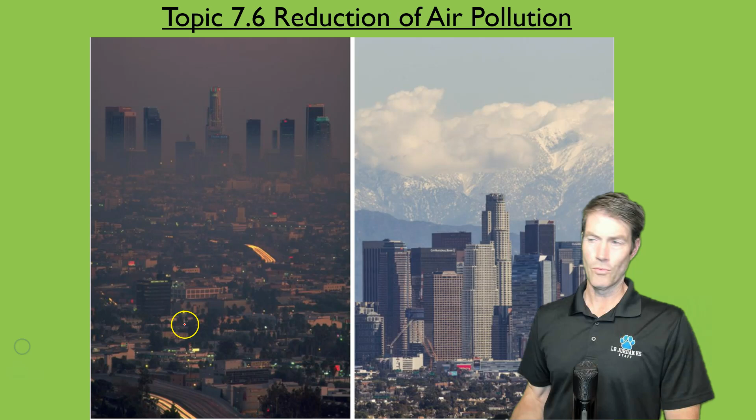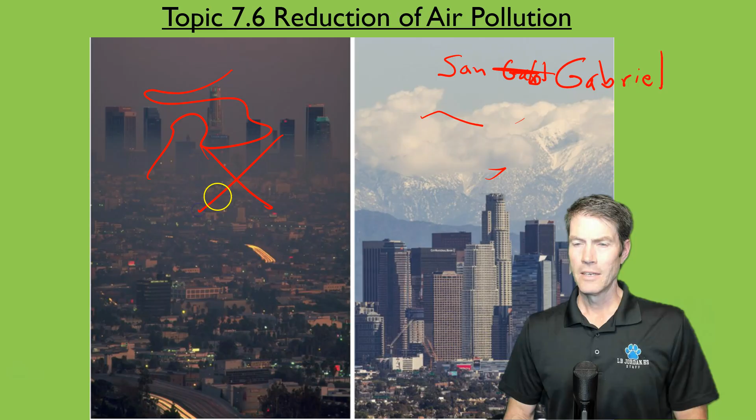So I'm just really happy when I can look out there and see the beautiful San Gabriel Mountains, see Mount Baldy instead of seeing all this haze. So this we don't want. So we're gonna get into how that happened. So lots of different methods that we have used here in California. One of the most effective is through regulations.

Companies complain about regulations all the time. People complain, in general, about regulations, but regulations help us live a more successful, happy life. Think about what daily life would be like with no rules at all. We know we need rules to live by in school, just going by our normal family life. We know we're happier when we follow rules, and when we follow rules for clean air, it definitely works out better for everybody. So regulation, different practices, conservation, so using less energy.

And using alternative fuels. So instead of the regular gasoline, trying to use biofuels or hydrogen. Biofuels don't really tend to work too well. About 15 years ago it was popular, people running their cars on fry grease or oil from fryers from fast food restaurants and restaurants in general. But even though there's a lot of that waste oil, there's not enough to really power our society.

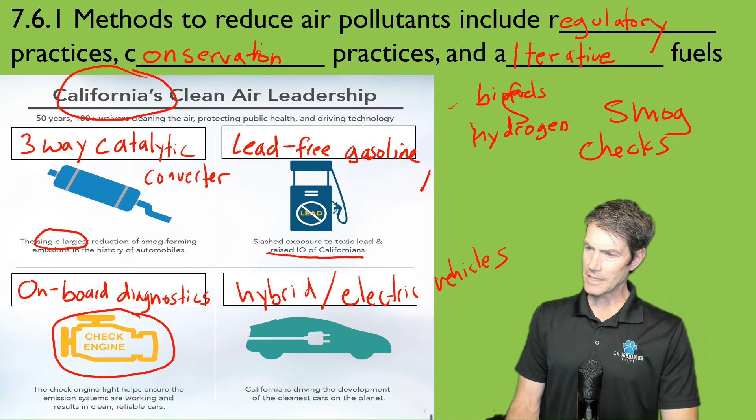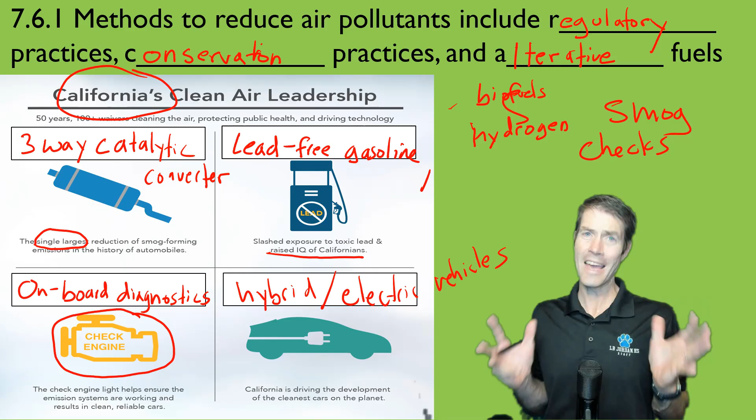And then down here we have hybrid electric vehicles. And I know you have seen, they're becoming more popular. Every time there's a gas crisis, a crunch, an increase in gas, they tend to get more interest in cars like this. I have yet to get one of these cars, but I'll tell you what, I will not ever miss going to a gas station again. So that's one thing that I could definitely do with that.

I love cars. I love a gas engine, the way they sound, vroom, when they turn on. Oh, I love that. I love it. I know it's killing us slowly, but I love it. But I could get used to an electric car and not going to a gas station.

Something that really kind of tripped me up when I first came to California, when I went to get gas the first time: all the gas pumps have these funny plastic shrouds over them. And those are vapor recovery nozzles.

So, I don't know why that happened. Nozzle.

You know what? It's just where it's going on the screen. So I'm going to write nozzle below it. Hopefully it won't keep popping.

There we go. So air pollution control, there's vapor that comes off. There's fumes when you're gassing your car. If you've ever been near it, you've smelled these. Some people think they smell good. They might smell good, but you shouldn't be smelling them. So try to stop, force yourself not to smell those.

So it's brilliant. So instead of all these tens of thousands of gas stations, when people are gassing up, releasing all these fumes and vapors into the air, instead of going into the atmosphere, they go back down the hose and back down where they belong, in the underground gas tank. So it prevents them from going into the atmosphere, which is a great thing.

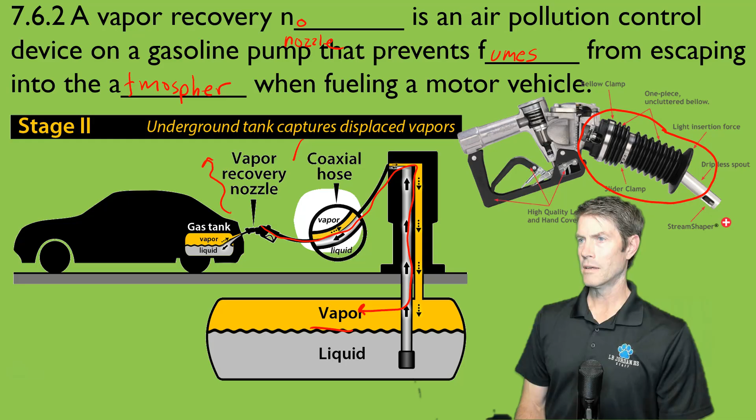Still kind of trips me up. When I go back to Washington State, we still don't have these. So I still am not quite used to not having that big vapor recovery nozzle on there. But yeah, check this out. I think that's awesome. It's totally cool.

Another thing we talked about, the catalytic converters, air pollution control device. See, I'll learn my lesson someday. I'm going to write that here. Air pollution control device for internal combustion, meaning regular gas or diesel engines, that converts different pollutants. Carbon monoxide, remember that's an asphyxiant. Nitrogen oxides, represented usually NOx, and hydrocarbons.

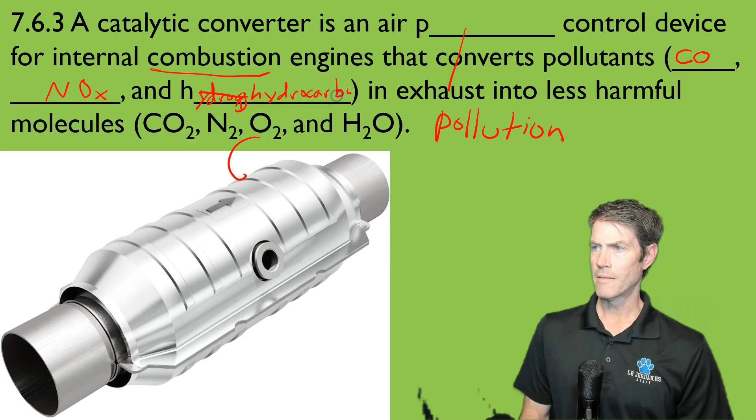We know I talked about hydrocarbons. That's that soot, basically. The three-way part, that means those three things: carbon monoxide, nitrogen oxides, and hydrocarbons, HC. Okay, those are the three things that this is getting rid of.

And this, by the way, is from a Honda Civic, one of my favorite cars. I love Honda Civics. Toyota Corollas are nice too, but man, Honda Civics, I love those cars.

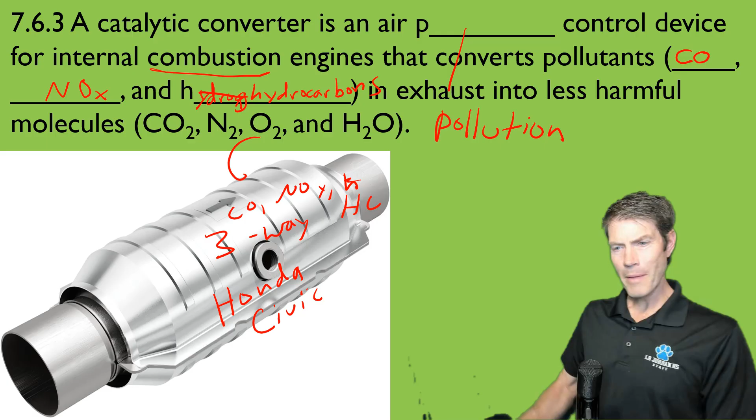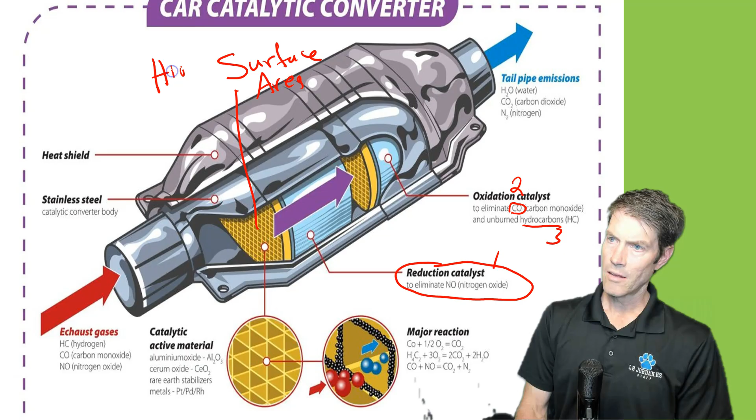So this is what it looks like in a Honda Civic. Oh, here's a better one. Here's the nitrogen oxide, here's the carbon monoxide, unburned hydrocarbons, for 1, 2, 3 ways it cleans the air. So yeah, just a sec. Remember, we talked a lot about surface area here. Very high surface area. A lot of area for these catalysts to work on the gas, the exhaust that comes in there.

And check out all these. This is why they're so expensive. Pt, Pd, Rh. This is platinum, palladium, and rhodium. Platinum, that's the Pt. Pd is palladium. I don't know, I just like saying these things. And Rh, don't get to say this very often, rhodium.

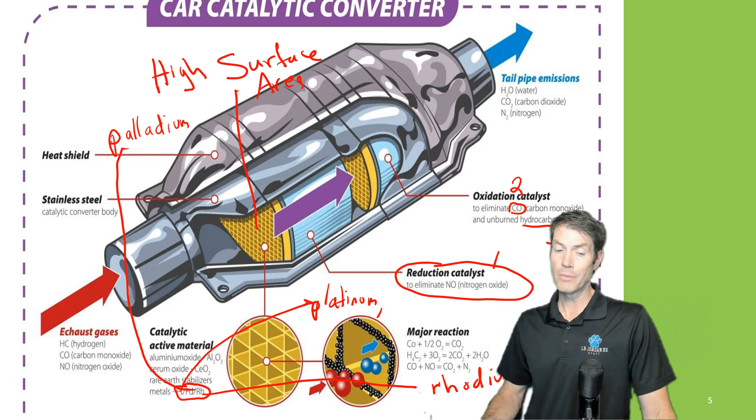So those tend to be pretty expensive. That's why these suckers get stolen. And to get them replaced, it can be thousands of dollars. But they keep our air clean.

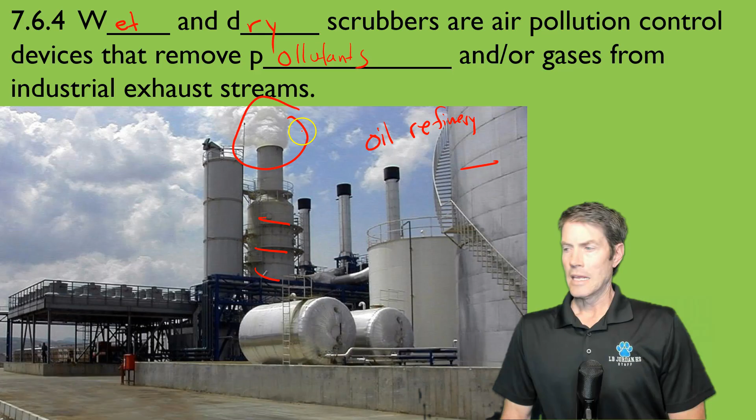fractionating columns there. So we want to keep these industrial centers like oil refineries from polluting too much, so there's wet and dry scrubbers that are installed. That's what these are. This equipment here is scrubbing the exhaust to try to clean it up, to remove pollutants and any gases from these industrial streams.

Scrubbers, yeah. Coal burning, that's specific for coal burning power, which we do not have. I don't know if there's any on the West Coast at all. There used to be one in Nevada. I think they shut that down. No, there are some over in probably Arizona, Nevada. So anyway, there's scrubbers and precipitators. They're called scrubbers. Let me focus here.

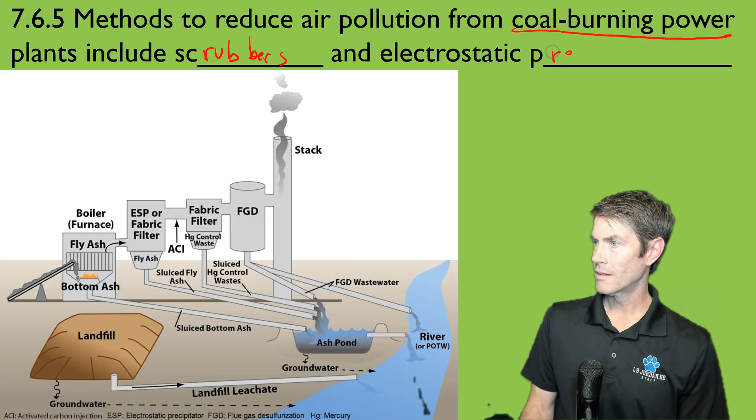Electrostatic, so they're using electricity. So it can be energy intensive, of course. So that brings the cost of making electricity a little higher. That's why, in general, they've been moving away from this, because to make it clean enough is costing them so much. It's easier just to do natural gas generation because of fracking, which we talked about before. We've had a lot more opportunity for cheaper natural gas, or just gas. Remember, it exists naturally, but how we get it's not natural.

Precipitators, basically, precipitation means creating a solid. So you're taking that gaseous mixture and you're creating solids you can get out of there, so it's not flying out the smokestack like you're seeing here. You see a lot of these like electrostatic precipitator. That's this right here.

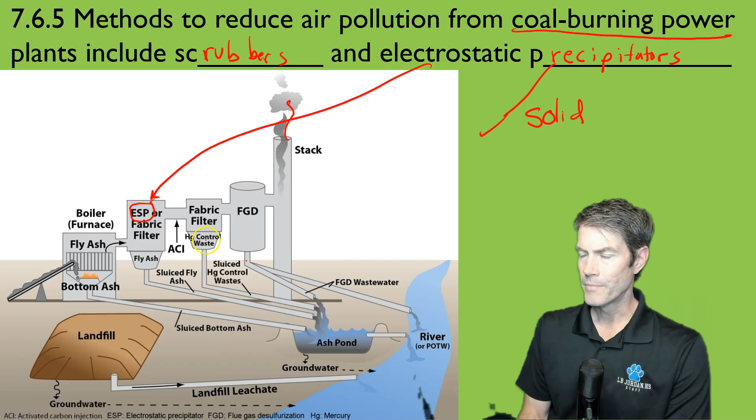Fabric filter. Yeah, just like you have a coffee filter, just a more elaborate, thick filter. And I don't know what FGD stands for. I'll get back to you. FGD wastewater, I'd look into that. But we mentioned ash ponds, I think, before.

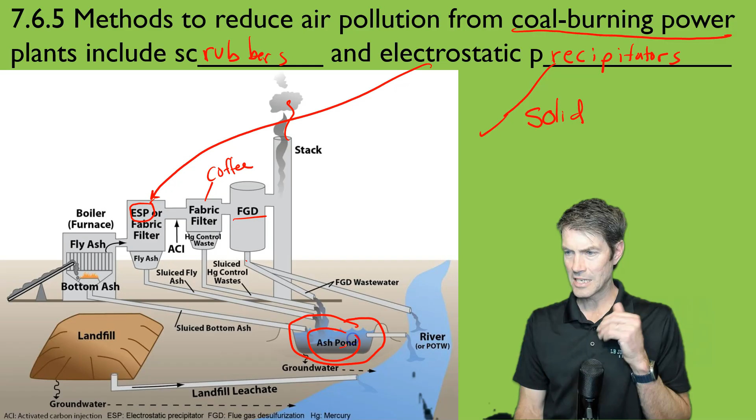All this stuff has to go somewhere. Instead of in the air, we're pulling it out. It's got to go somewhere. Right now, they put it in a big ash pond, and they let it settle. And it looks like they're letting the top part, which is a little bit cleaner, go back into the river.

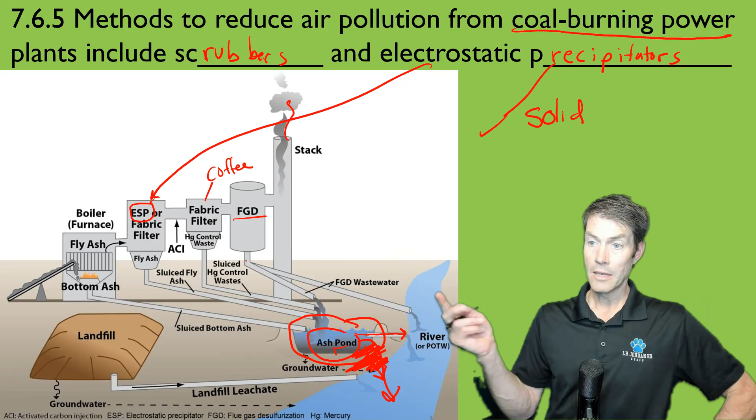But look how close it is to the river. What if this little dam broke and all the stuff went into the river? Big problems. And we'll get to that in a second. So we have a dry scrub. No, this is a wet scrubber.

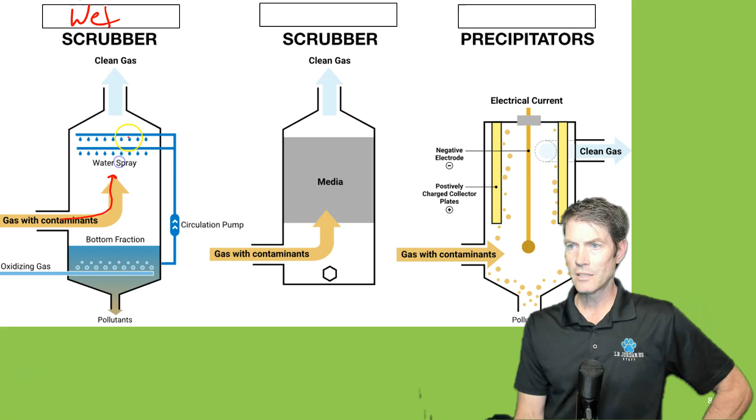Basically, put all the gas with all the funky, nasty stuff through here. Let the gas rise. As it does, just spray it. This is kind of like natural, you know. Remember, after it rains, our air is clean because it naturally comes down through the atmosphere, gets rid of all the stuff. So you're basically doing this natural process in industrial fashion.

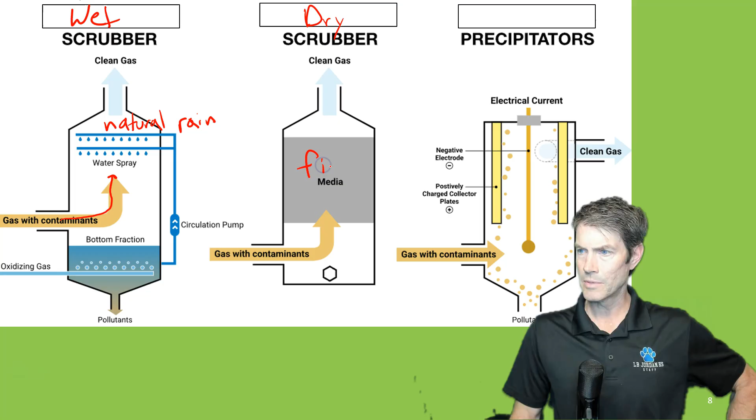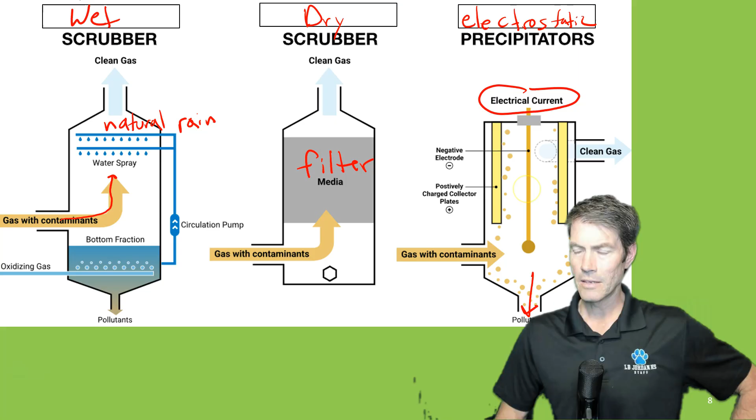Then you could also do a dry scrubber, basically with filters. Sometimes these are all done at once, like we saw earlier. So media, meaning filter. And then here we have electrical current being used, so electrostatic. Electrostatic precipitators basically is a way to get rid of the pollution.

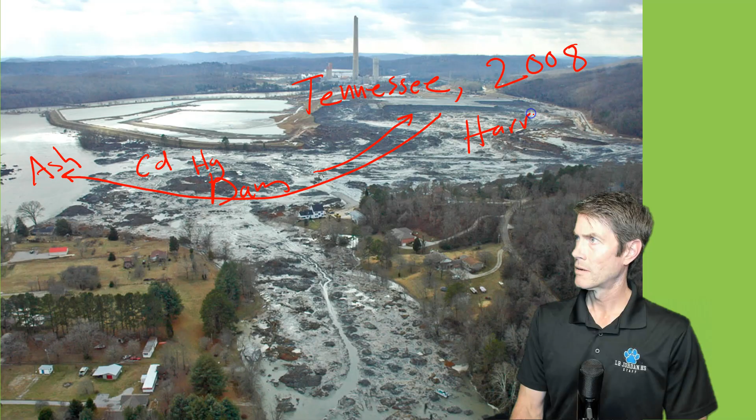Big disaster. This really is terrible for the environment. I mean, this is not mud. This is fly ash, mostly, or a large percentage of it. And this is some of the worst stuff you could come into contact with. And look at that. Almost half of the first floor is just covered.

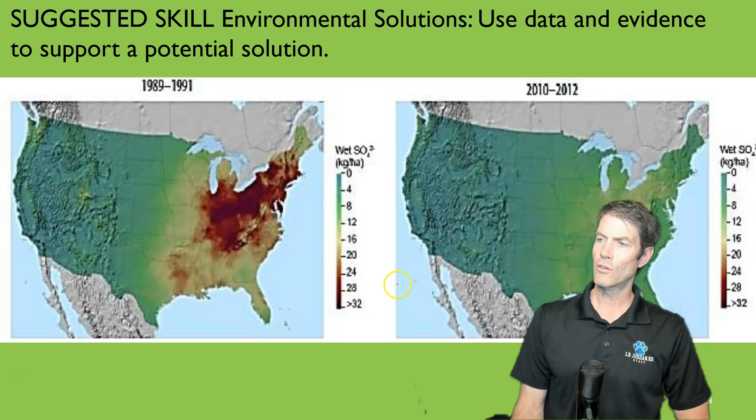So, a skill you need to have is to be able to look at data and evidence to support a solution. So here we have sulfates, wet deposition of sulfates, wet and dry. In the late 80s, early 90s, you can see this whole part of the East Coast from Massachusetts all the way over almost to Wisconsin. Just a lot of sulfur oxides. And then, what's that? 20 years later, barely any. Okay, so major improvement.

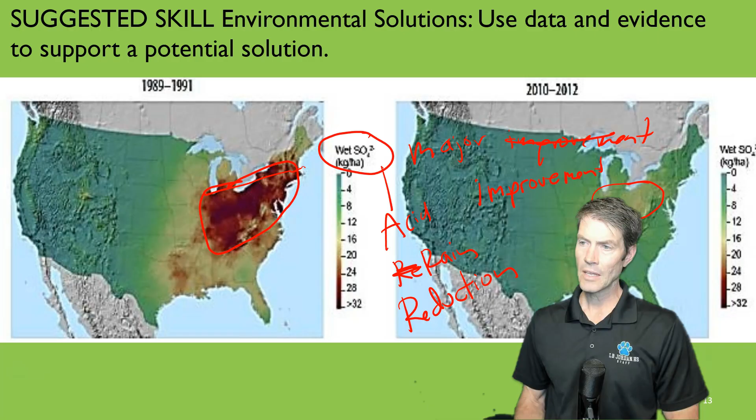Remember, these sulfur oxides contribute to acid rain. So big reduction in acid rain. So removing sulfur oxides from the air, or from the coal plants and other industrial processes, creates less acid rain. We see evidence right here to support a solution to our acid rain problem, which is reducing the amount of acid we put into the sky. Who would have thought?

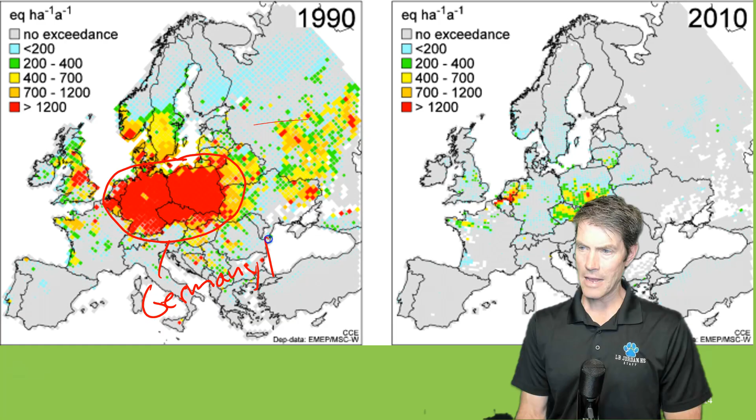And here's, I like this one, it's pretty clear. Evidence, Europe had a big acid rain problem because of the same exact issue. Pretty much all of Germany and Poland had big issues with acid rain. And this was what, 1990, same time frame. By 2010, Germany pretty much eliminated it. Look at that improvement. Still some issues in some parts of Poland.

If you look at this right here, I believe this is Kyiv over in Ukraine. This would be Stockholm. No, Stockholm is like here. I gotta look at that. What's the capital of Norway? I'll look into it. Here's around London. Look at all that acid rain they got. But look, they pretty much took care of it. Okay, still got a little bit.

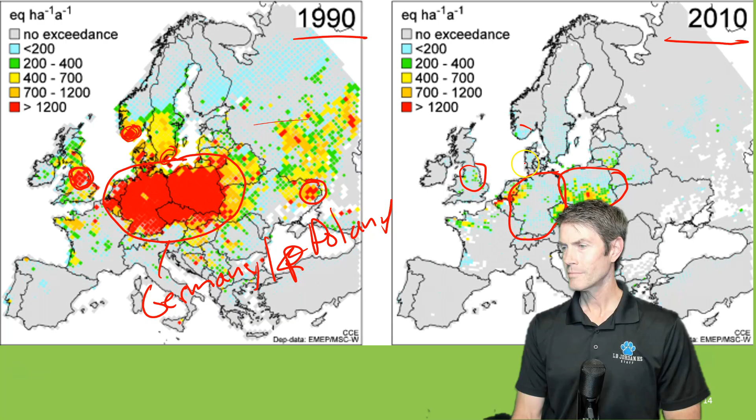So, we want this. We don't want this. So air pollution is preventable. We can make major strides if we coordinate our action. Every time we use transportation, whatever we decide to use, we can make an impact. Still, corporations have by far the biggest responsibility, but we all can do something to help make our air cleaner for us to breathe.